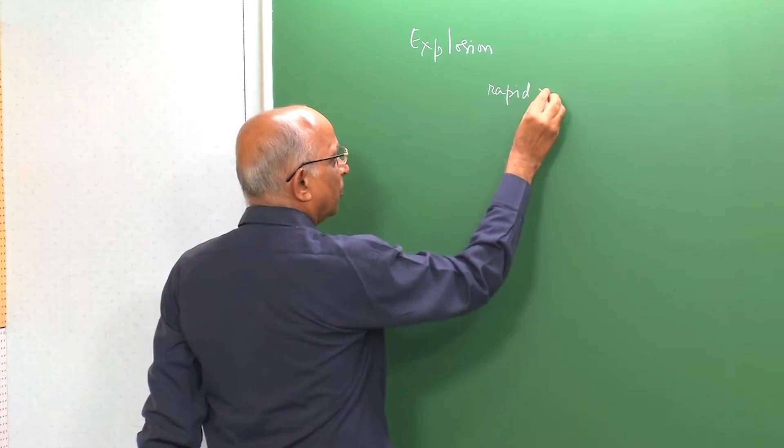Let us qualify it a little better. Suppose I have a region or a zone or a small volume in which some energy gets released. This energy release drives the blast wave which propagates out, and the energy release gets redistributed by the lead shock wave. When the lead shock wave is here, the energy gets redistributed in this zone, and so on. It is essentially the redistribution of energy which is impulsively deposited which leads to an explosion.

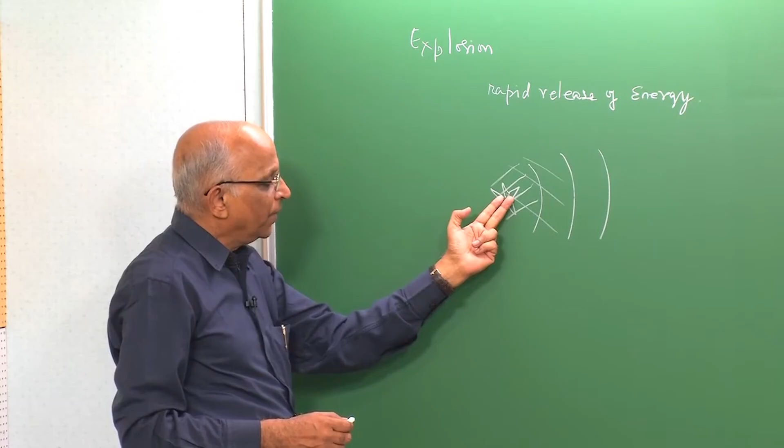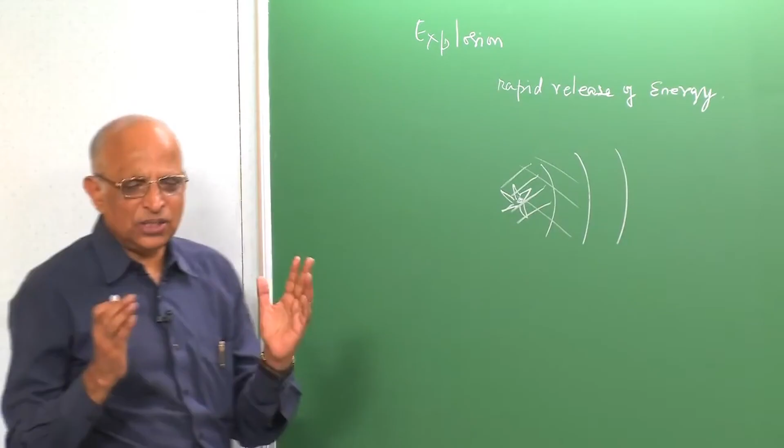When we talk about this redistribution of energy, it is the potential energy of the explosive which gets converted into kinetic energy and potential energy, but it is all contained within the lead blast wave. There is something important here, which we have been telling repeatedly: the material does not move, it is the energy which gets redistributed. This point must be kept in mind as we go along.

We also said there were two points. If this energy release gets into the thermal energy of the medium, it is unavailable energy, unavailable for driving the blast wave. Second, since the energy is redistributed, when the blast wave continually decays and reaches a faraway point, that is, when we are looking in the far field, the energy could get conserved. We will take a look at it in subsequent classes.

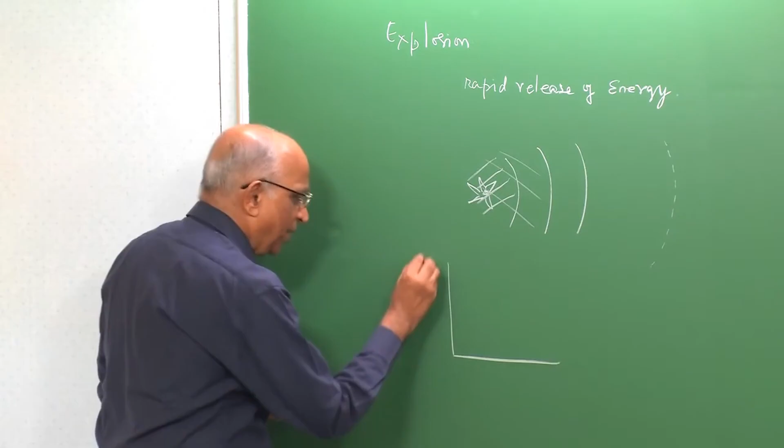This is the way we defined an explosion, and we found that the lead shock is continually decaying. On a streak diagram in which the y axis is t and the distance is x, or often defined as the radius rs from here, it decays out. Initially it travels a longer distance for a short time, then it becomes an acoustic wave in the far field.

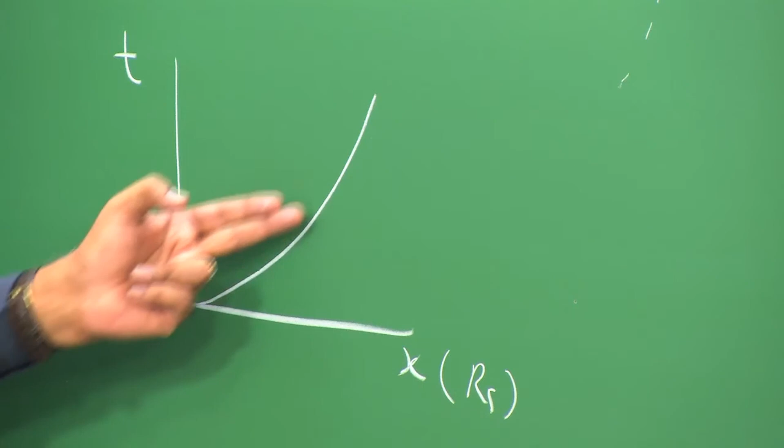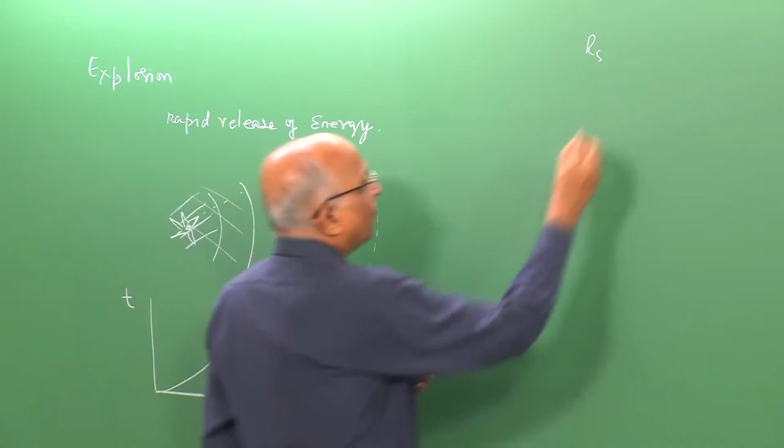It is continually decaying, the energy gets redistributed, it is a terrible transient, unsteady problem, and therefore difficult to solve. So we went through non-dimensional analysis, looked at the parameters, and got the dependence: the distance by which the lead shock travels at some time t after the impulsive release of energy can be written as Rs equals A t to the power 2 by 5.

The second point: the velocity with which the lead shock moves, drs by dt, which we denote Rs dot, can be written as a constant B times Rs to the power minus 3 by 2. We also found the rate at which the blast wave decays: denoting Rs double dot as d2Rs by dt squared, we have Rs double dot times Rs divided by Rs dot squared equal to minus 3 by 2.

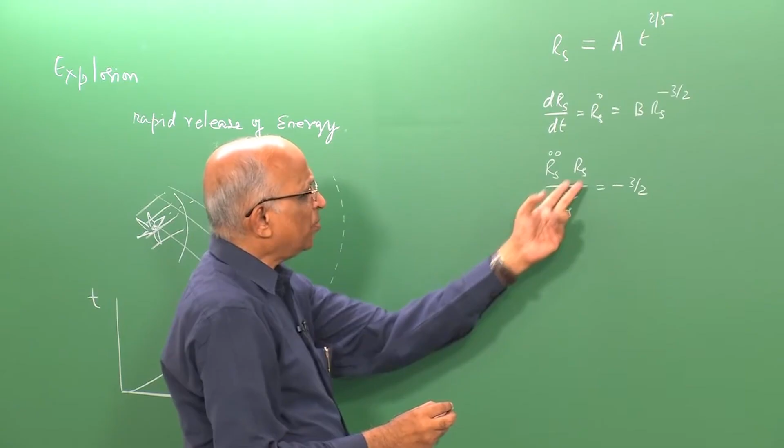In other words, since Rs is positive and Rs dot squared, being velocity squared, is also positive, it continually decays, and this is what we got from dimensionless analysis.

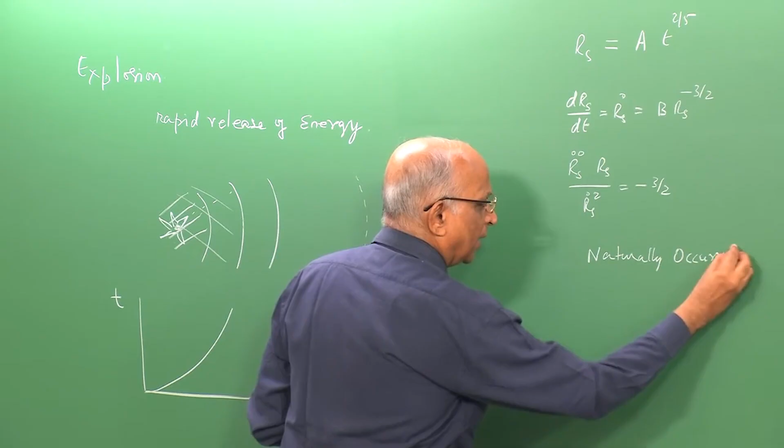Recall we said there are different types of explosions. We said explosions could occur in nature, which we called naturally occurring explosions. We also talked about accidental explosions, for example in the kitchen something leaks, gas leaks, and all of a sudden we have an accidental explosion.

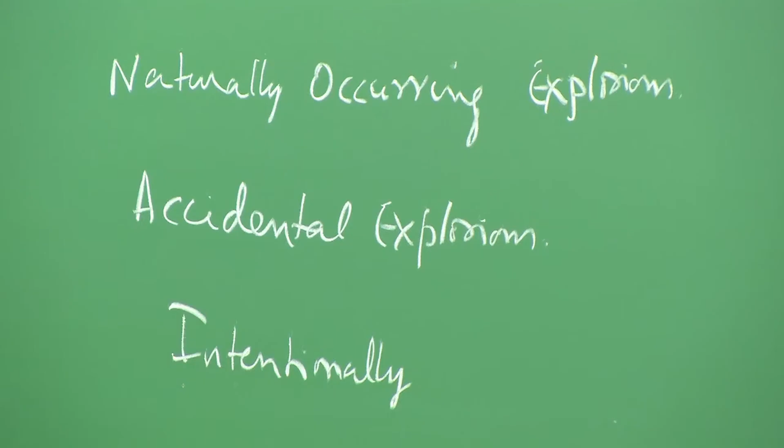We also talked about intentional explosions, maybe during warfare somebody drops a bomb at some place, or of late antisocial elements like terrorists who plant mines or explode bombs in crowded localities. We say these are intentionally created explosions, or intentional explosions.

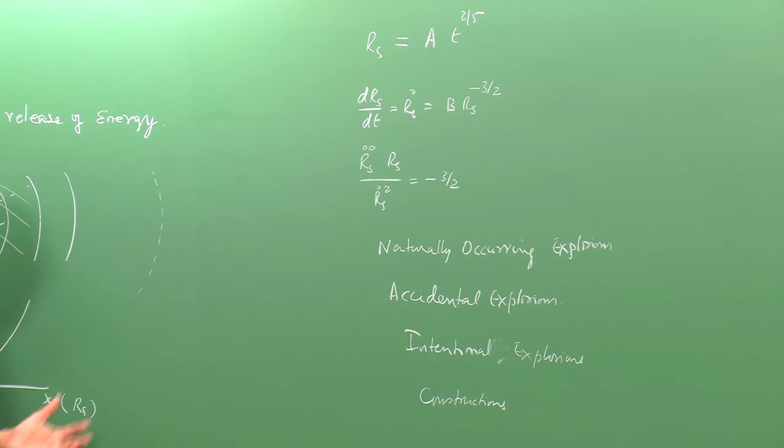We also noted that an explosion could be used for constructive purposes, like airbags, for surgery, or maybe for making canals and all that. Well, these were the different types of explosions we talked of.

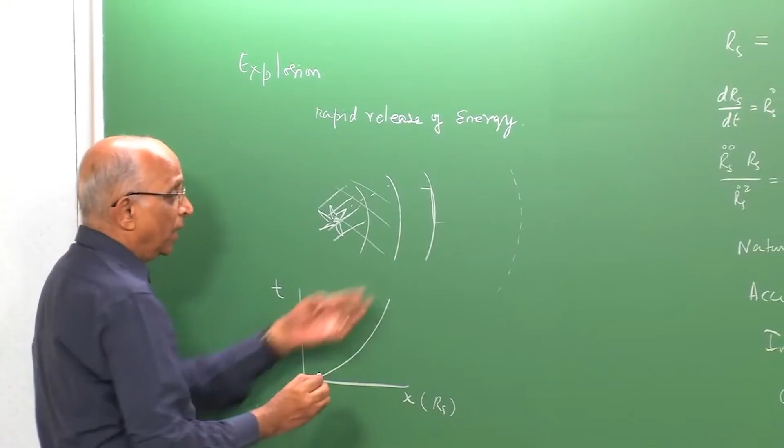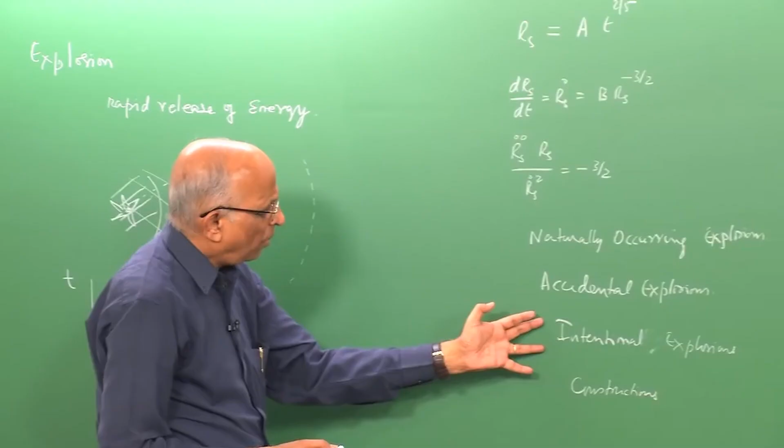Now in today's class, to relate to the theory we must develop, recall we just developed some value of the shock based on dimensional analysis without going into the detailed physics. But we also found that across the lead shock there is a spontaneous jump in pressure, from the ambient value to this new value, and behind it you have the momentum or impulse of gases. It's necessary for us to determine these quantities to find out the effect of the explosion on things around it. So if we go through some examples of different types of explosions, we will be better equipped to understand the theory.

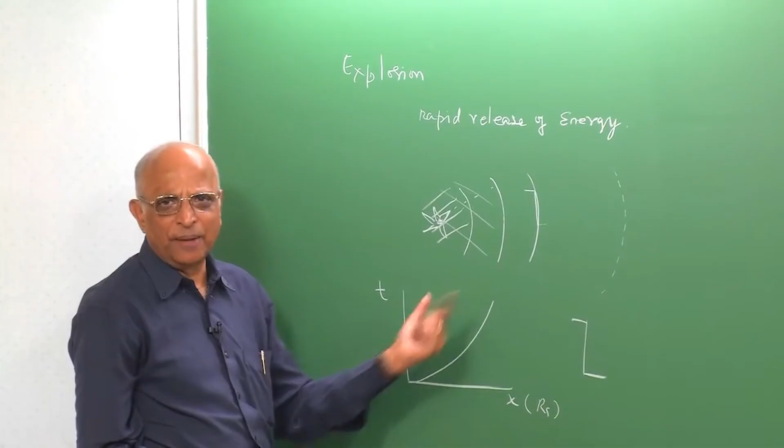Therefore, in today's class, we will take a look at different types of explosions and see how they behave, and based on that we will go back and revisit the blast wave generated from the energy source, and find out the parameters of a blast wave which could cause damage. Having said that, let me come to the first slide.

Let's go back and see what could happen. You have an arc discharge taking place, something like a line discharge, and therefore I will start creating something like a cylindrical wave which propagates out from here. This is Rs dot, that is the velocity with which it goes.

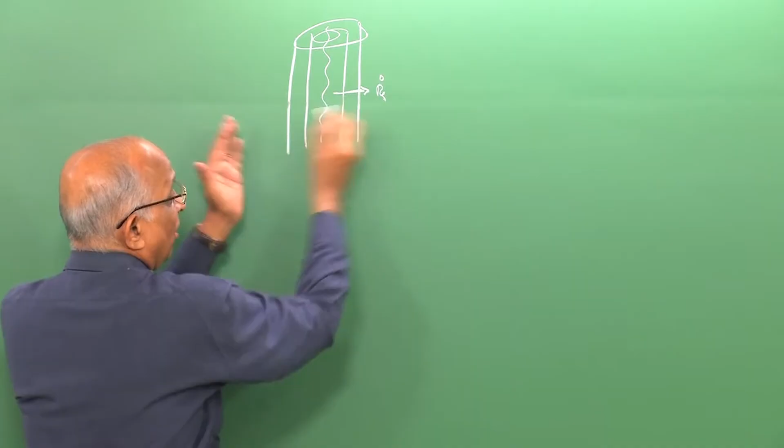In the near field, what is going to happen? I again plot t versus the distance, Rs, over here. Initially it starts at high velocity and decays out. In the limit, when the wave travels far away, I hear a rumble of thunder. If I am near to this, I hear an extremely loud bang, loud thunder, and far away I just hear the rumble of thunder.

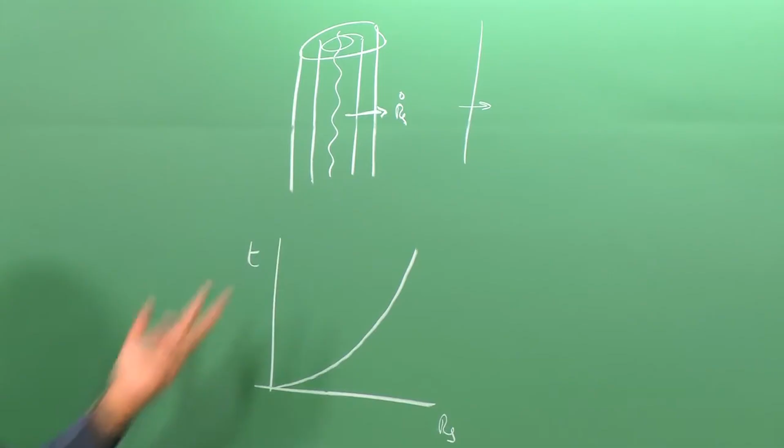We looked at this. Well, this is the first type of naturally occurring explosions. Lightnings are frequent; in some places they occur more often than not. Let us go to the next type.

The next is volcanic eruptions, and in this picture, again from National Geographic, I show a volcano spewing out fire as it were. I have a huge fire, and in this, hot gases are generated. The hot gases are sometimes charged, and therefore I could get an arc discharge, and something like a lightning, I could get a blast wave.

But very often what happens is, some of these volcanoes, when they erupt, there is also seismic activity, like tidal waves, or else the volcano is in the ocean. Very often during the volcanic eruption, seawater enters into the volcano, which is spewing out hot gases and hot, molten lava. When water enters and sees this huge hot mass of lava and hot gases, it spontaneously flashes into vapor, becomes superheated, and the energy is so high that it creates an explosion, something like a physical event wherein the phase of the water changes.

We had this very famous explosion at Krakatau, about 40 kilometers west of Java, which happened on August 26, 1883. Mind you, it is quite old, but this explosion is extremely famous. In fact, in this volcanic eruption, over a distance of about 4,500 kilometers away, the blast could be heard. Point two, over a distance of about 500 kilometers, the buildings got shattered. That is the power of this particular explosion—the blast wave generated created real havoc in this naturally occurring volcanic eruption.

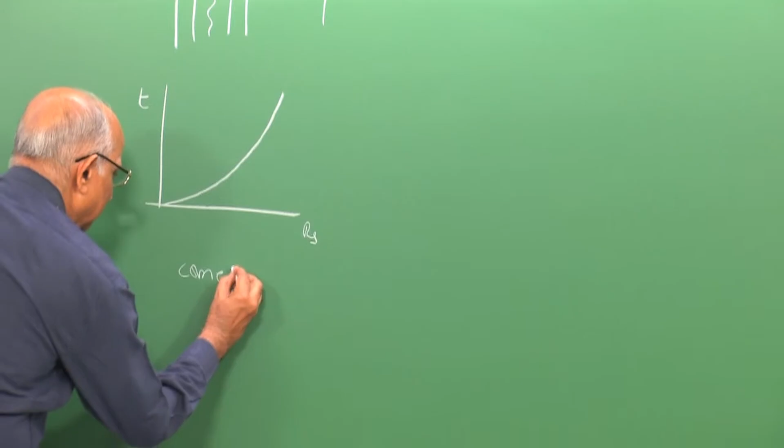We also talk in terms of asteroids in space. What is the difference between an asteroid and a comet? These are all loosely formed objects in space, not planets actually, and they do not have a particular type of trajectory. The asteroid consists of metal and rocky material, whereas a comet consists of ice, dust and also some rocky material. When the comet approaches the sun, the ice evaporates and a comet has a long tail, whereas an asteroid, having metal, is something which is more solid.

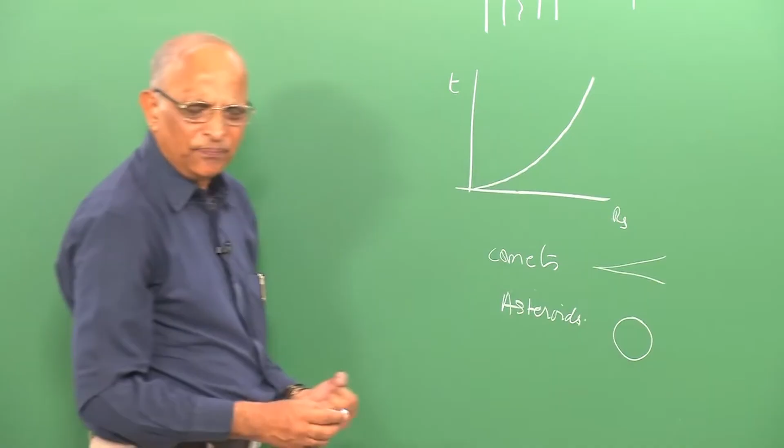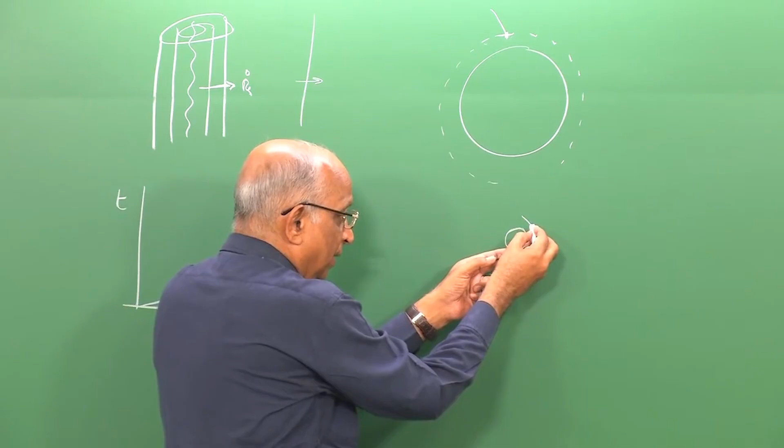Sometimes these comets and asteroids enter the earth. Above the earth we have atmosphere for something like 15 to 20 kilometers high, and when a comet or asteroid enters the atmosphere, it immediately creates kinetic energy and creates a blast wave to equalize the velocity. The energy release is so high that it creates a blast wave, and this blast wave can cause damage.

One such comet or perhaps asteroid, it is not very clear which, entered the atmosphere at a distance of around 8 to 10 kilometers over a place known as Tunguska in Siberia on June 30, 1908. The blast wave generated during this re-entry was so strong that over a distance of around 150 kilometers, the trees just got felled. Fortunately Siberia being a desert, there were not many buildings around, but buildings got demolished over a distance of something like 5 kilometers. That is the type of explosive energy release that takes place during the entry of an asteroid into the atmosphere.

It is not just one case of this. You will recall around a few months back, on 15th February 2013, over the Russian town of Ekaterinburg, we had a comet entering the atmosphere at a distance of around 5 to 7 kilometers above the surface of the earth. The blast wave it created was felt at a city known as Chelyabinsk, 200 kilometers away from where it really entered. Due to this blast wave, something like 200 to 300 buildings got broken, hospitals got damaged, and it was big news in all the newspapers saying meteor rattled Siberian city. Fortunately, nuclear and chemical facilities were safe, they were switched off for some time.

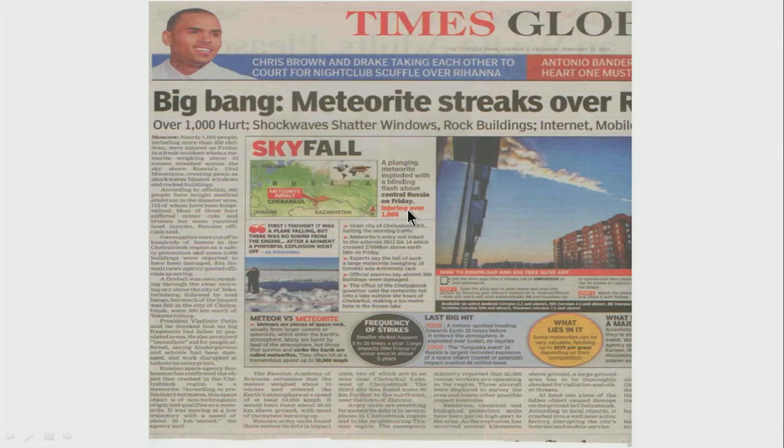Let us go ahead. The big bang from this comet was such that as it streaked over Russia, it caused shock waves, shattered windows, buildings got broken, and it led to services like internet and mobiles being affected. This is the type of power associated with a comet re-entering, and there is a lot of interest in comets and asteroids.

It was said to be about the largest size, and looking at the mean size of this particular comet, it's around 17 meters or so in diameter. It's a very small one compared to what was there over Tunguska, which was something like 30 meters diameter. Mind you, these are all small things which can really cause so much damage, and therefore there is quite a lot of interest in the blast waves generated when a meteor, a comet or an asteroid, enters the atmosphere.

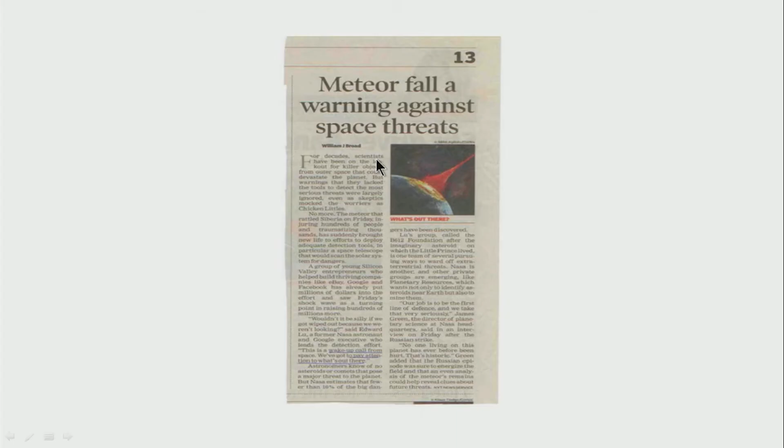We have this problem: when this asteroid re-entered, you find this brilliant flash due to energy release over this Russian town, and the blast wave creating the damage. Since some asteroid is supposed to re-enter the earth around, let us say 2036, there is some interest. I must also point out that one such huge asteroid is said to have re-entered the earth around 6 million years ago, and it is responsible for the extinction of life at that time, including the extinction of the dinosaurs.

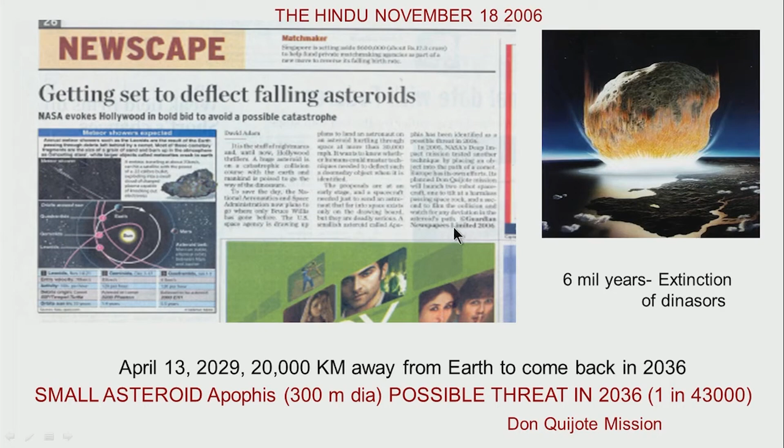This is the fourth type of naturally occurring explosions, and the last one, let us see what it is like. We talk in terms of stellar explosions, explosions in the star. You have a star whose life is going to get over, its fuel is consumed, therefore it has just neutrons in it.

Because of gravity, the neutrons shrink, it becomes very dense, and because of the density it explodes. High density, the neutron explodes, a lot of energy gets released, you have a brilliant flash, and I also show something like a supernova, that is a stellar explosion.

This is again taken from National Geographic, and what you find in these stellar explosions is the temperature reached during the explosion is so high that atoms combine to form heavy substances like gold, silver, maybe platinum, and the source of these materials on Earth is supposed to come from stellar explosions.

Well, these are the 4 types of naturally occurring explosions. Having seen these 4 types of explosions, let us quickly summarize. The naturally occurring explosions are...

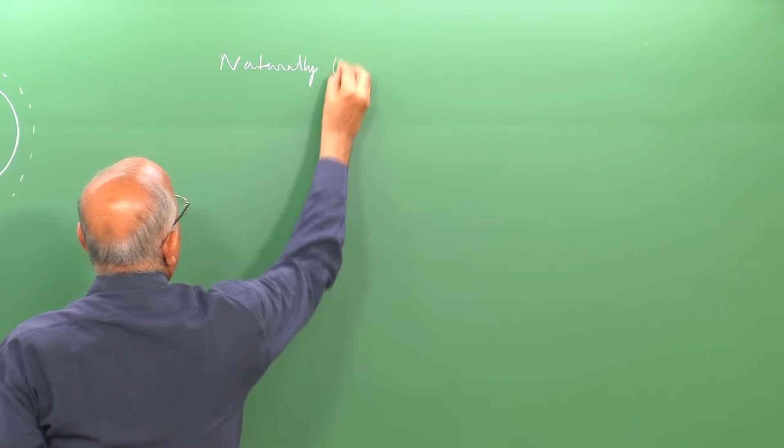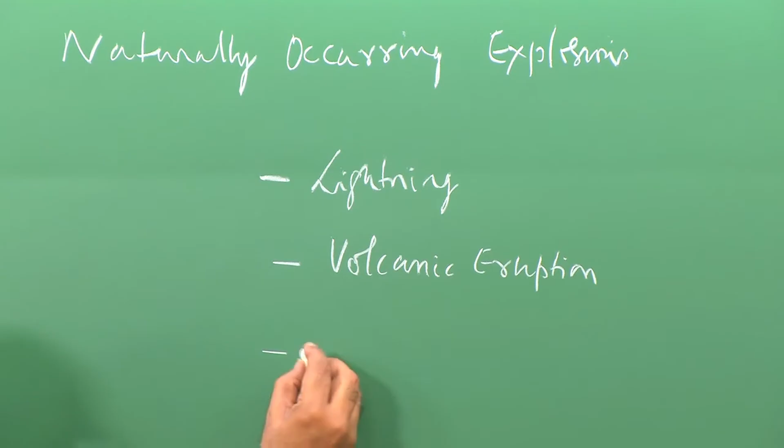Either, let us say, lightning. Second, we say volcanic eruptions, in which some physical explosion like seawater entering the volcano can release huge amounts of energy, like the one at Krakatoa. Maybe the third type, in which we have asteroids, comets entering the earth.

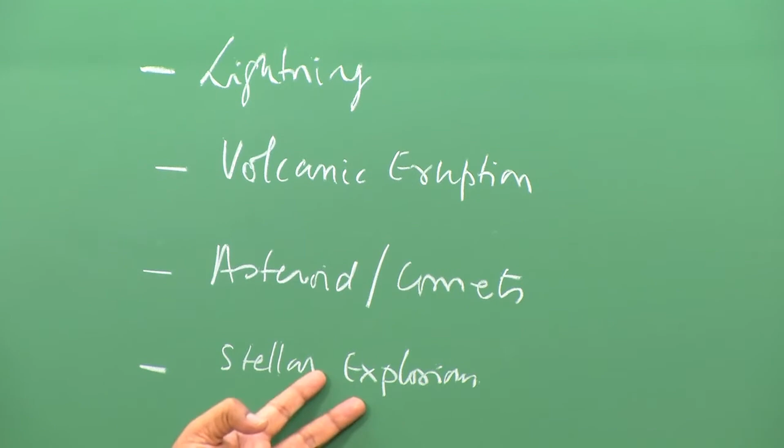And the last one, we said, could be stellar explosions. The stellar explosions cannot be heard for the simple reason that we have vacuum between the star and us, and therefore there is no question of sound reaching us, no question of a blast wave reaching us. But we must remember it is the light intensity which is seen, and also we have electromagnetic waves in the form of cosmic radiation which we perceive from stellar explosions.

Having said that, let us come to the next type of explosion, namely the accidental explosions. These accidental explosions occur quite frequently. Whatever precautions we take, somehow or the other an accident occurs.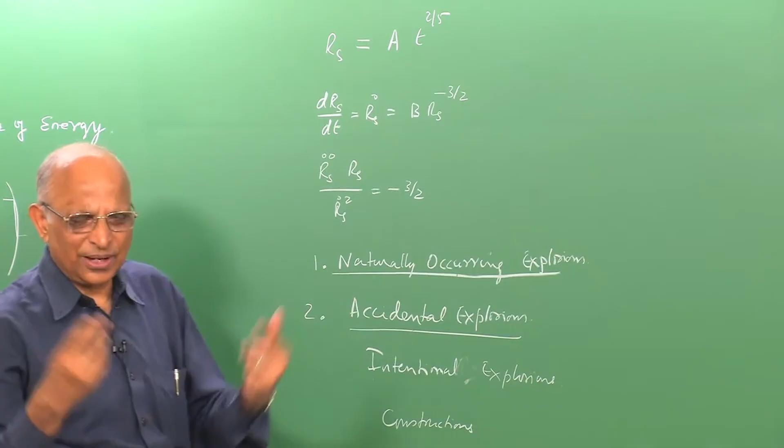How do we define an accident? Let us first be very clear what an accident means. When we say an accident, it means something like an unplanned event, right? Something which we have not planned, accident. And how do you say, well, anything, when I go across the road, something comes and hits me, say I meet with an accident.

Therefore, for unplanned activities, there is always a chance that an accident takes place, and the word chance in Arabic is given by the word Azhar. This is an Arabic word, and therefore, whenever we talk in terms of an accident likely, we associate the word hazard.

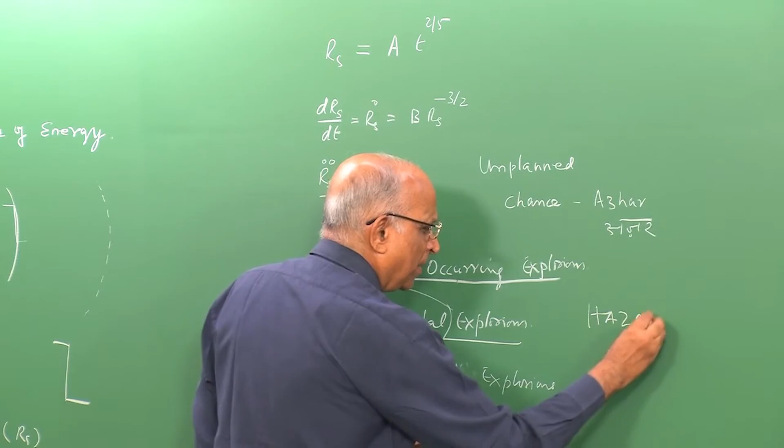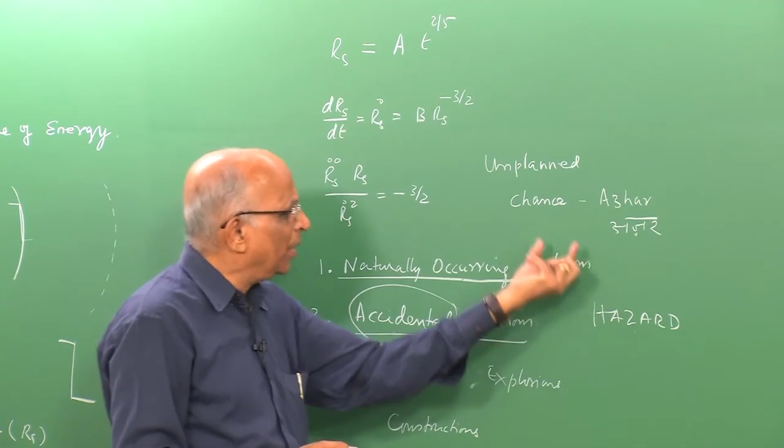Whenever we move substances which are somewhat likely to cause an accident, we say these are hazardous substances and we must be careful, and most of these substances are hazardous under some condition or the other. Therefore, let us take a look at some of the accidental explosions, and mind you, when we do risk analysis, we will address the hazardous nature of substances and see how to take precautions to avoid accidental explosions.

Therefore, I come back to the slide. I talk in terms of accidental explosions. Mind you, in the first talk I said about cooking gas exploding in the kitchen. Maybe there is a stove, maybe a cylinder, the gas leaks, mixes with air, somebody goes and puts on the switch or creates an electrical spark, and bang, the entire building is gone.

These accidents, even in a metro like Chennai, keep occurring, and there are something like 3 to 4 such accidents in a year, and you see the building getting demolished, the neighboring building getting demolished. We go to the next one. This also shows the same accident wherein the liquid petroleum gas stored in a cylinder gets exploded.

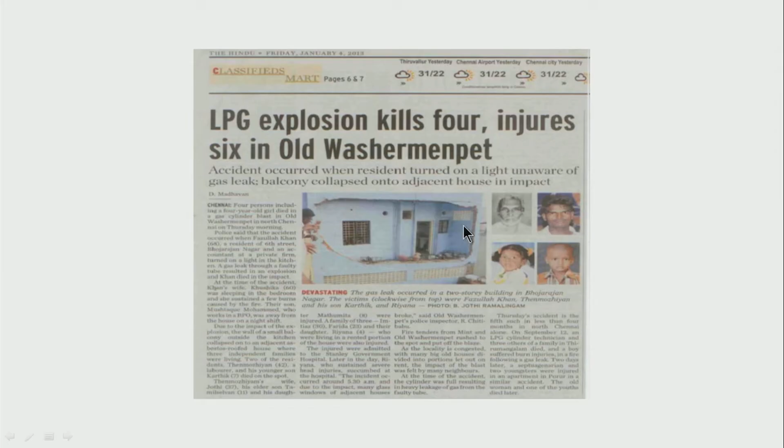Well, it is not only the gas from the cylinder which explodes. In the previous one, the gas leaked and created, within the confinement of the kitchen, a mixture which could explode. Well, when we transport maybe some substances which are reactive, in this particular case, this happened on something like...

24th March 2012, about a year and a half back. What happened is, this was a Korean ship which was carrying an explosive or reactive substance which was toluene, and this toluene is somewhat volatile. It formed a vapor and it exploded, and it resulted in the killing of a person.

Mind you, at that particular time there were not many people on the ship, but still it caused an explosion and created havoc. Therefore, whenever we transport energetic substances, we have to be careful lest an explosion or a blast wave is formed.

This is something which has been in the news for quite some time. On July 6, 2013, there was this huge number of oil cars or oil tankers being taken. There were something like 72 wagons being pulled by 5 locomotives in the township near Quebec in Canada.

And what happened was, maybe after parking these wagons safely, the brakes were put on according to the drivers, but somehow the brake got released and the wagons freely rolled.

And when the wagons freely rolled, they picked up some velocity and derailed, one wagon on top of the other, and during this process a leakage of oil took place. When the leakage occurred, it caught fire, and the heat from the fire increased the evaporation or pressure in the containment of the wagons, leading to a huge blast. The township near Quebec called Lac-Mégantic got totally devastated. Mind you, the death rate was not very high, but even then it was a major explosion.

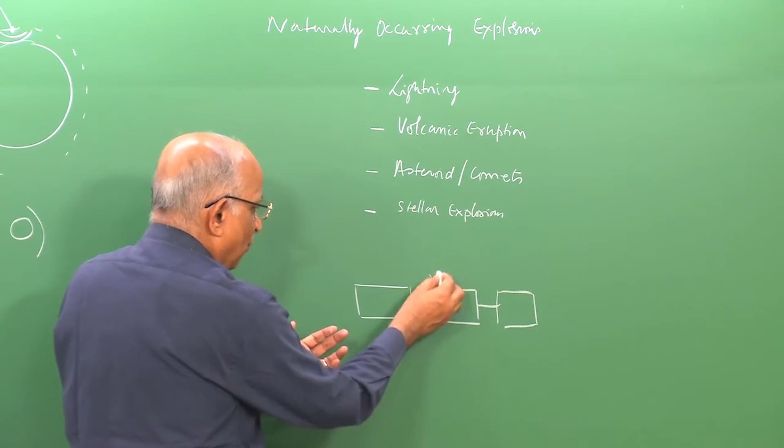Propane is essentially a liquid, and when it spills, it evaporates and forms a vapor of propane. When you have a spill taking place, you have a fire, and if this fire heats the wagon, the pressure inside it increases. You have hot propane here, and when the pressure increases such that the wagon bursts, you have a huge quantity of vapor generated. Not only does the wagon burst, but a huge quantity of vapor gets generated, leading to a huge ball of fire, and this creates a blast wave.

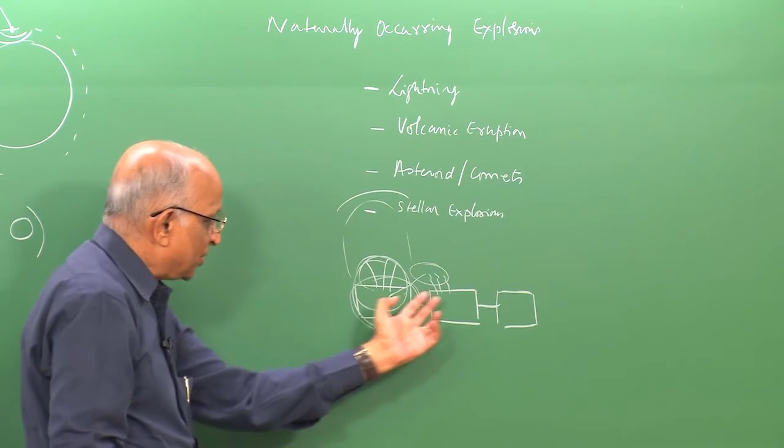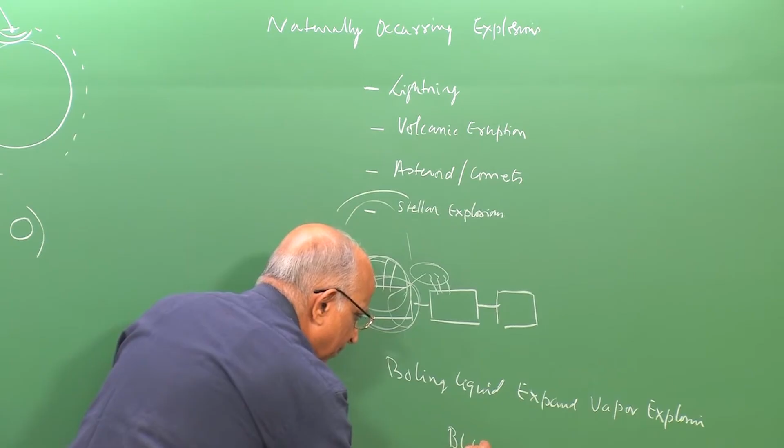This is known as a liquid getting heated from some other source - you have something like a boiling liquid expanding vapor explosion. It is known by the word BLEVE, boiling liquid expanding vapor explosion. This is what causes this explosion.

We have such explosions happening in our country at Jaipur, but it happens in the open atmosphere - it is an unconfined gaseous explosion, and these require some particular attention. We go to the next one.

In addition to a wagon exploding, when we have pipelines conveying liquid petroleum gas, liquid natural gas, liquid propane and all that, it is quite possible that sometimes leakage occurs in the pipeline. The vapor is released, or the liquid is released and vaporizes, catches fire, and creates an explosion. There are some typical explosions I would like to discuss. One happened at Port Hudson in Missouri. This picture I got from Professor Strehlow.

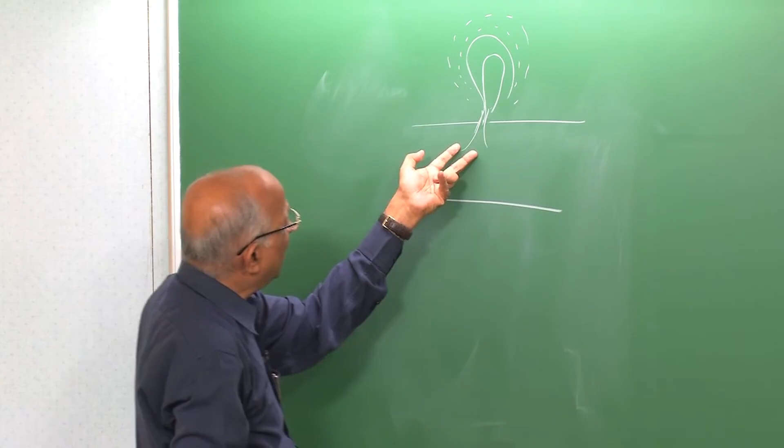At Port Hudson in Missouri, a pipeline carrying liquid propane - let us come back to this example. You have a pipeline, something like 0.2 meter diameter. The pressure was something like 50 bar or so at which it is communicated. There has been some rupture in the pipeline, and liquid propane is a liquid under atmospheric conditions at temperatures less than around minus 45 degrees centigrade. Therefore liquid propane escapes, forms a huge fountain of liquid, and then evaporates, creating a fog and smog of propane. This accident, as seen there, happens in the month of December when it is quite cold, and the surface wind at that condition was not very high.

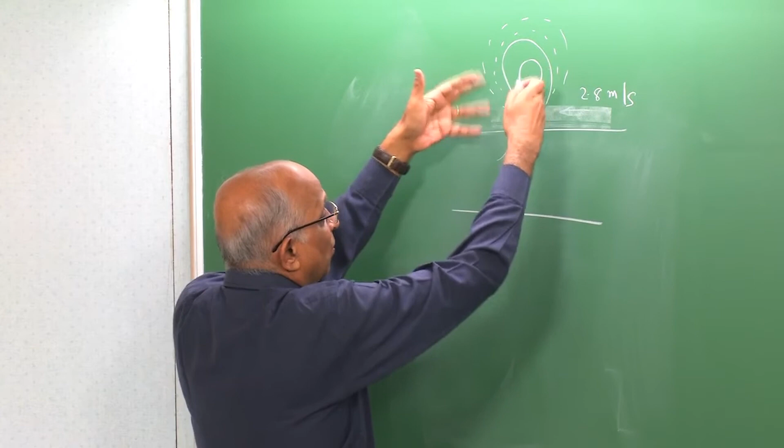It was around 2.8 meters per second, and therefore the cold propane just collected on the ground, as it were, over the ruptured pipeline, and it gradually moved. There is no ignition source at the point where the accident took place, so it just keeps mixing with air. Downstream, there was something like a valley.

There was a building over here, a concrete building, which housed refrigeration units so that foodstuff could be kept cool. The gas vapor moved here, through the crevices in the door and window, mixed well with air, and since there are motors in the refrigeration unit, it catches fire.

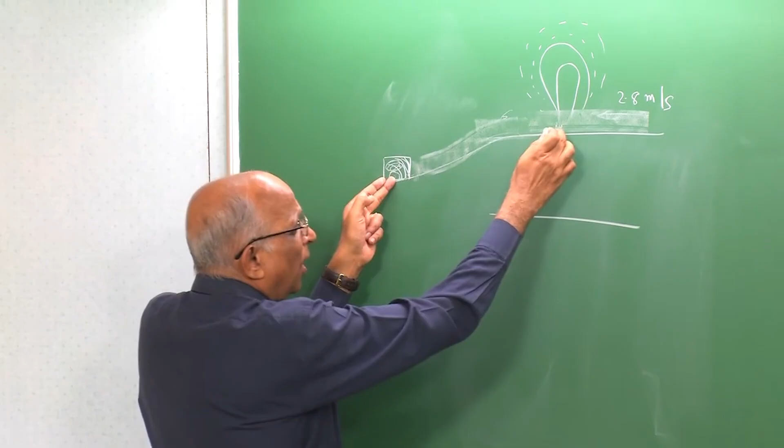It develops a blast, and with so many different units there, the flame becomes something like an explosion or detonation. It took around 13 minutes for the mixture to form and cause this blast, which then ignited the whole thing into a huge explosion. It could be heard something like 50 kilometers downstream, and it decimated the place.

This is the explosion involving liquid propane as it happened at Port Hudson. I come back to the slide again - Port Hudson, December 9, 1970.

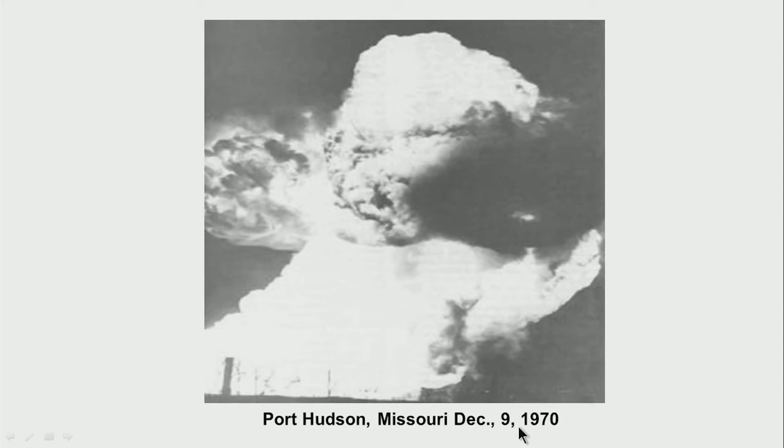We have a number of such explosions, and one is catalogued in literature as the largest man-made explosion ever. This happened in the Ural Mountains in Siberia. There was a pipeline around 0.7 meter diameter, conveying natural gas, essentially methane, designed for a pressure of something like 25 bar.

It was operated at 12.5 bar, but over a distance of almost 1 kilometer of pipeline, it ruptured downstream - something like 1500 meters downstream of the supply point. Nobody really noticed that gas was leaking. A huge quantity leaked, and mind you, this was June 4, 1989.

The spill accumulated on the ground and does not mix well with air. Let's go back and take a look at how this accident took place. The pipeline was conveying LNG, so over the ground you had low temperature methane accumulating, which does not mix so well with air.

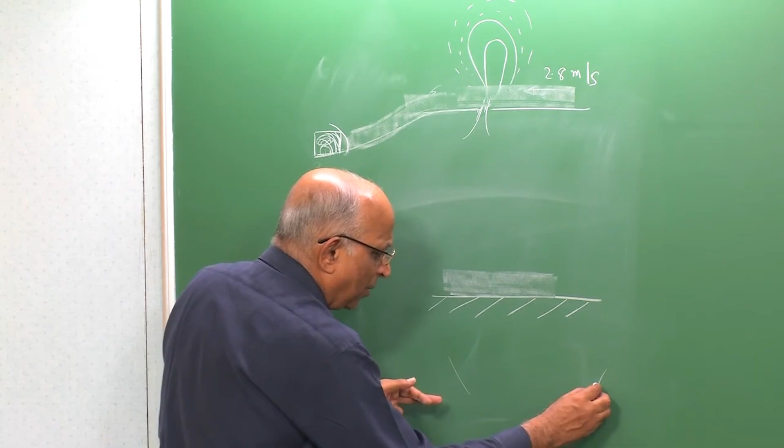There was no accidental ignition source - after all, it's a Siberian plain, not very well populated, with no houses or anything leading to spark sources. But if you look at the geography, on the east you have Vladivostok.

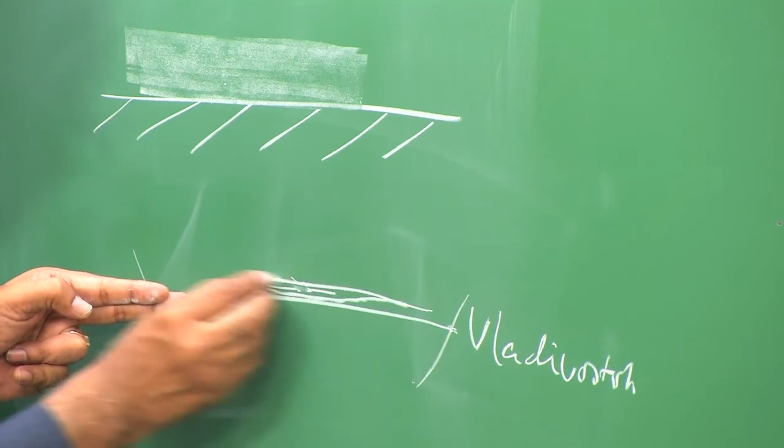There is a train that runs from Vladivostok to Moscow - the Trans-Siberian Railway - on a double railway line. As fate would have it, the spill took place over a long distance along both tracks, with a forward train going from Vladivostok to Moscow on one track.

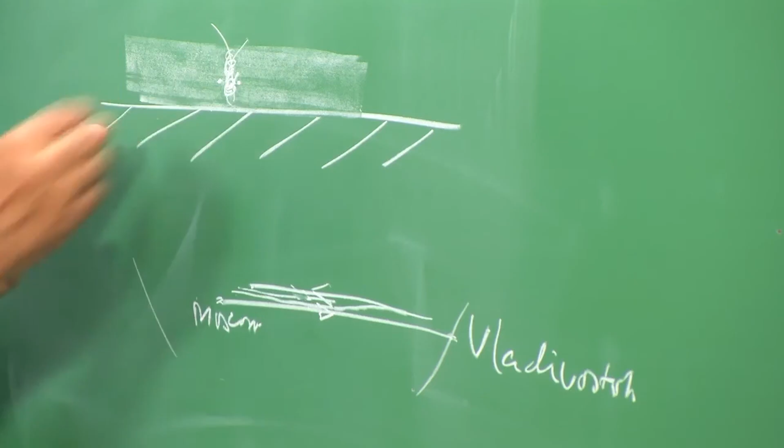On the other track, a train was going from Moscow to Vladivostok, and both were adjacent to each other. The turbulence generated when two trains pass each other mixed the gases well, and since these were electrical trains, the overhead electrical spark ignited it, causing a huge bang - the largest man-made explosion ever. It killed all inhabitants of both trains, something like 600 people got killed, and trees were decimated over a distance of 4 kilometers.

It is not only this pipeline - in many chemical industries, pipelines convey explosive substances from one container to another, and many such incidents occur in chemical plants. One typical example often quoted in literature is the accident at Flixborough in England on June 1, 1974, which created a ghost town in England that still continues to be a ghost town because of the damage it caused.

Let us go to the next example. So far, what have we looked at? We've examined explosions - accidental, occurring from gas in a confinement, and occurring from vapor in an unconfined geometry.

We looked at pipelines, we looked at wagon derailment, and now we come to something like solid substances. This accident took place on around April 17th this year, about 5 months back. This was a factory in the town of West in Texas, US, and they were storing ammonium nitrate. It is not very clear, the investigation is still ongoing, but let us take a look at it. We will be looking at some of the explosions involving such substances.

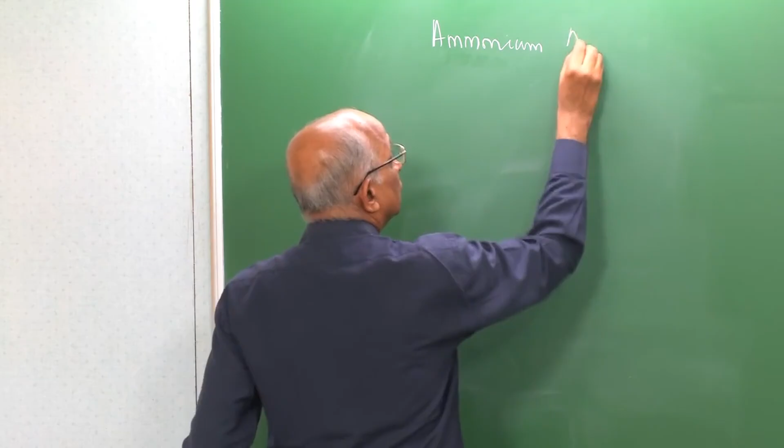Sorry, it is not ammonium perchlorate, it is ammonium nitrate, which is used as a fertilizer. This substance has both fuel and oxygen in it, and if it begins to catch fire, maybe it gets heated and the rate of release is high, and when a large quantity is involved, it goes into a chemical reaction which keeps feeding back heat to it, and you get such a powerful rate of energy release that a blast gets generated. This is what happened at the Texas factory in the town of West, and the entire town got decimated.

Well, in this case of a solid substance like ammonium nitrate, we say it is a condensed phase explosion. We take one or two more examples of this.

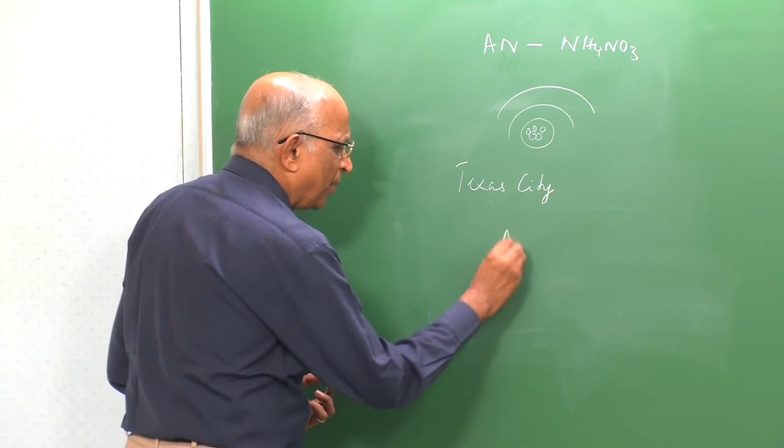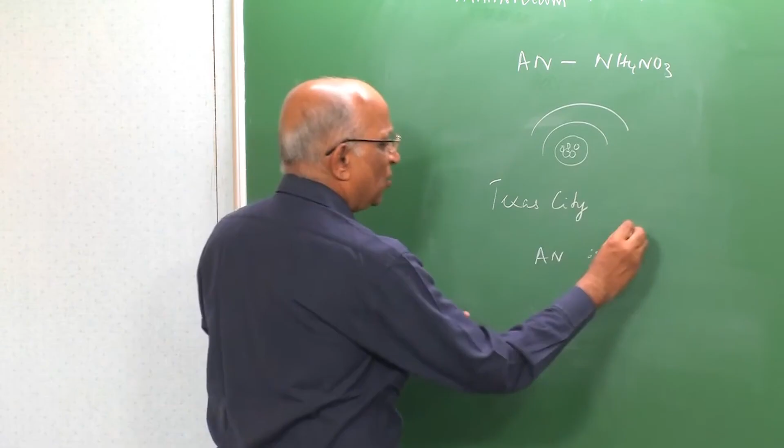Ammonium nitrate, NH4NO3, contains a lot of nitrogen. It is used as a fertilizer, and there is a lot of demand for fertilizer because you want to fix nitrogen in the soil. In this case, we do not want to use real ammonium nitrate directly, but we would like to make it more resistant to explosion, so wax is coated on the ammonium nitrate crystals such that its intensity of explosion or susceptibility to burning and explosion is reduced. So instead of AN, plain ammonium nitrate, you have what is called fertilizer grade ammonium nitrate, which is essentially coated ammonium nitrate, normally coated with wax.

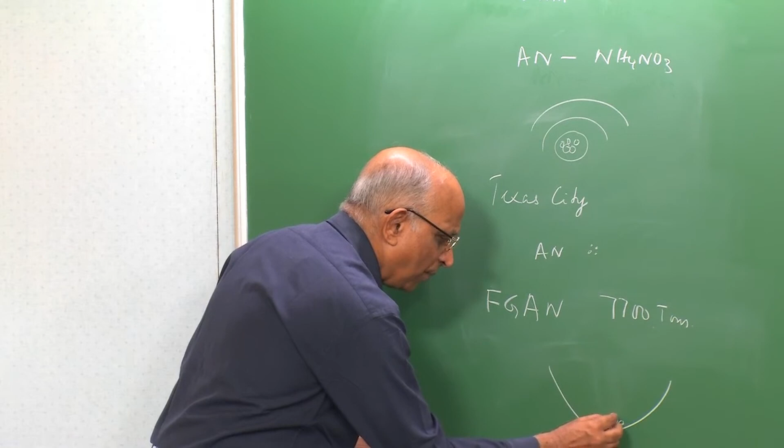In this particular case, you have something like 7,700 tons of ammonium nitrate, all in cartons or bags, stored in the hull of the ship. The hull of the ship is somewhat insulated, so heat cannot really escape from inside to outside or vice versa, and if the temperature increases, it keeps heating it up further. What was observed was that the temperature increased due to some chemical reactions taking place inside, there is always some element of reaction taking place, and when they found some smoke in the ship...

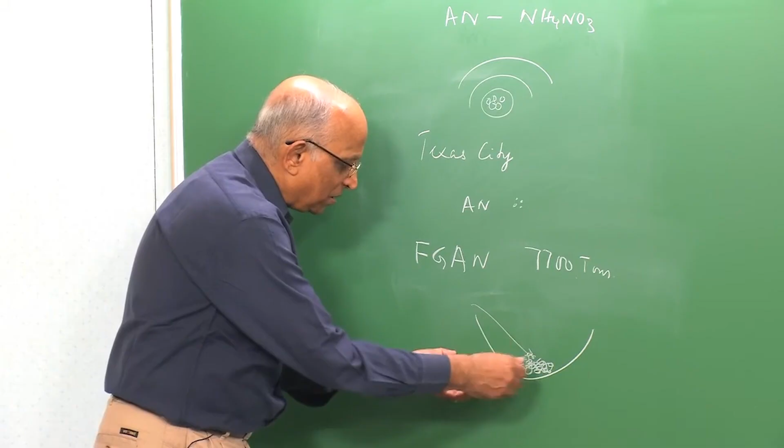People sprayed water and steam onto the smoke which was being created. Now the temperature kept going up, and the steam further contributed to the reaction, so the chemical reaction got terribly increased because of this. There is a spiraling of the rate of chemical reaction as time progresses, it builds up, and the rate becomes so much that high intensity energy is released spontaneously, and you have a huge blast wave which gets generated. The blast wave in this case was so strong that the entire hull of the ship got blown off, and it was carried over a distance of a few kilometers.

Almost 600 people died. Over a distance of 16 kilometers from the site of the explosion, well, nothing remained. People got knocked down, buildings got destroyed. Over a distance of 60 kilometers, trees were uprooted, and this explosion from Texas City could be heard at a town 400 kilometers away, and that is the intensity of this explosion.

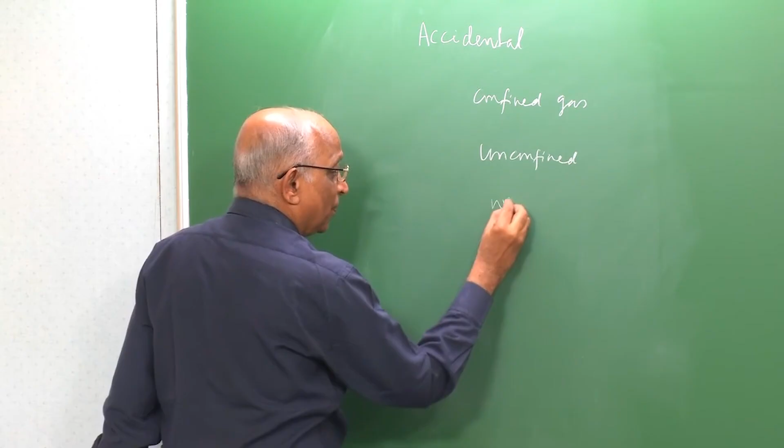What have we considered so far? Let's quickly review ourselves such that we can look at some other explosions and draw some examples. We tell ourselves, well, accidental explosions - an accident is an unplanned event. It could be something like a confined one using gases, it could be unconfined, it could be something like wagons derailing, and we have boiling liquid expanding vapor explosions. We could also have solid substances like condensed explosions, in which maybe some chemical reactions occur, like in Texas, maybe at Sivakasi, we have all these condensed explosions.

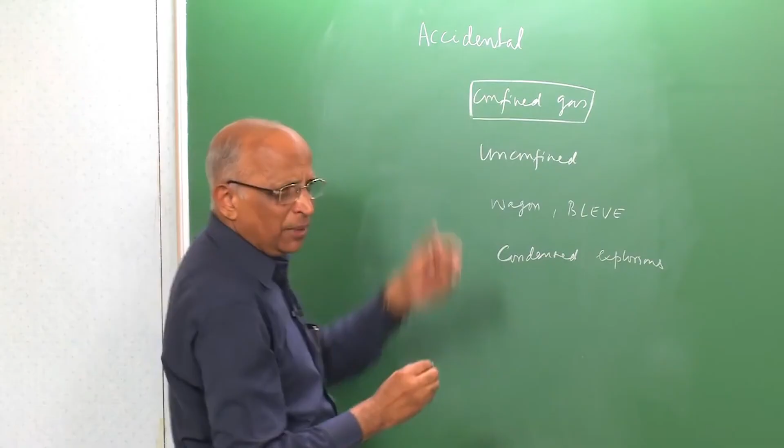There was this particular aircraft which took off from New York on July 17, 1996. It was the TWA 800 flight, and since it was supposed to go over a short distance, not all the fuel tanks in the aircraft were fully filled with kerosene, or what we call jet fuel, in New York. It was the summer month, mind you, it happened on July 17th, and therefore one central fuel tank was near empty, because that much fuel was not required for the flight from New York. I think it was going to Europe, and therefore the quantity of fuel which was loaded was not in all the tanks. 11 minutes after takeoff, the aircraft just exploded, and it was a huge fireball.

Analysis showed that since the central fuel tank was near empty, there was a small amount of kerosene - aviation kerosene - in it, and on the ground, wherein you have a lot of air available, an explosive mixture could not be generated. But the moment it goes to higher altitude, wherein the air is less, a combustible mixture with air got generated, and at that point some electrostatic spark could have resulted in this particular explosion. It is again a confined fuel-air explosion, in which you had a huge fireball; all the passengers and crew of this flight were killed in this particular explosion.

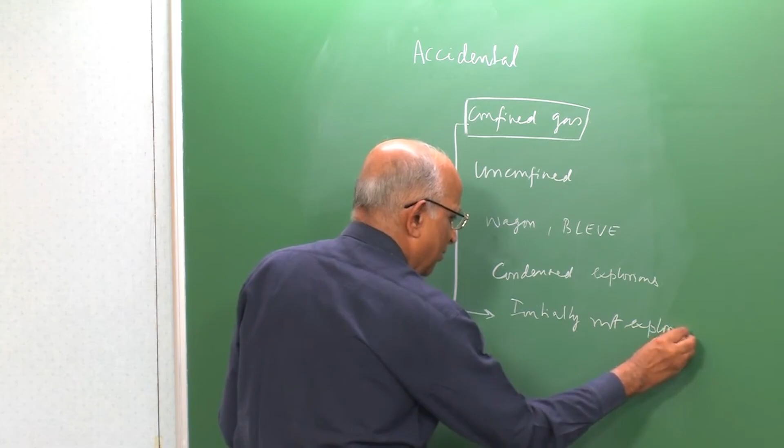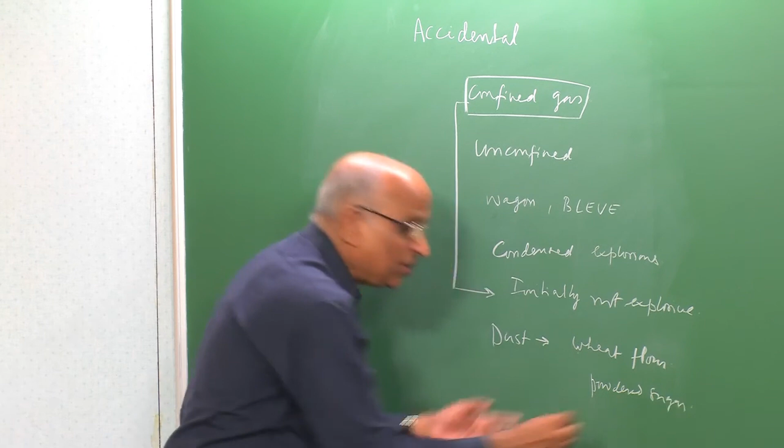It is not only gas, liquid, and solids - energetic solids - but dust can explode. I would like to qualify this further. What did we just say? Well, I could have confined explosions because of maybe some tankage, maybe a gas mixture which is formed, which is initially not flammable or not explosive, but which becomes explosive under certain conditions. We tell ourselves not only solids, liquids, and gases are explosive - dust, like for instance the wheat flour we consume to make bread, or sugar, or fine powdered sugar used for icing - all these are explosive substances. If mixed with air in sufficient quantities, it could explode.

One such instance, the first recorded dust explosion, was in Turin, Italy, on December 14, 1785, wherein a particular baker sends a boy to the godown to collect some flour - I think it was wheat flour or maize flour, I'm not very sure. This boy, in the evening, which was quite dark, takes a candle in one hand and picks up the flour in the other. Being a boy, he is playful, he tosses the flour, and this flour, when it mixed with air, exploded - and this was the first recorded dust explosion.

We have such explosions involving dust in large numbers in the US, wherein they handle food crops in confinement. We had this in Wichita, US, wherein 7 people were killed in a dust explosion involving, I think, wheat dust. We also had an entire port terminal destroyed in Brazil in November 2001, which was conveying grain being unloaded at the particular port. Therefore, dust explosion is also a type of explosion which could occur.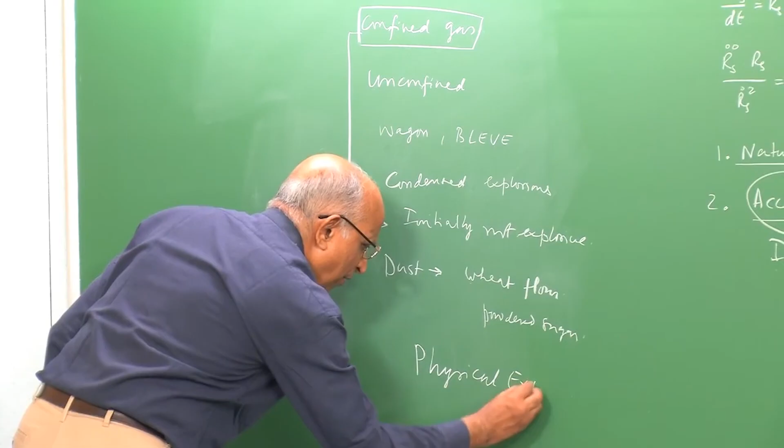We already talked in terms of physical explosions when we discussed the volcano, in which water got into the volcano, got terribly heated up, and superheated vapor formed an explosion. In physical explosions, it is essentially a substance which is not a combustible or high energy substance, like water, which can create an explosion.

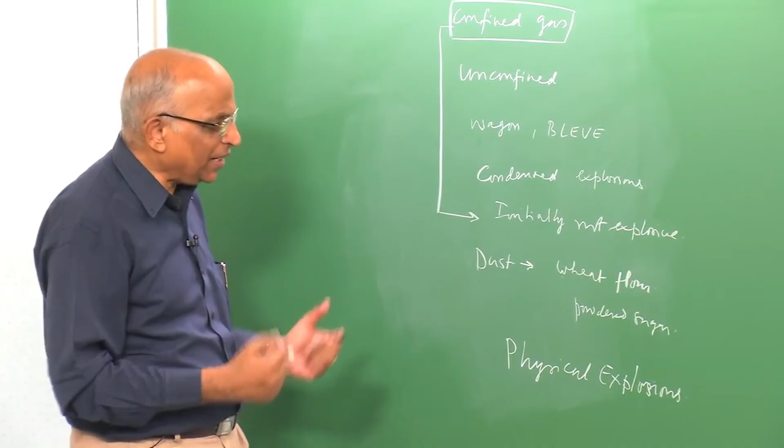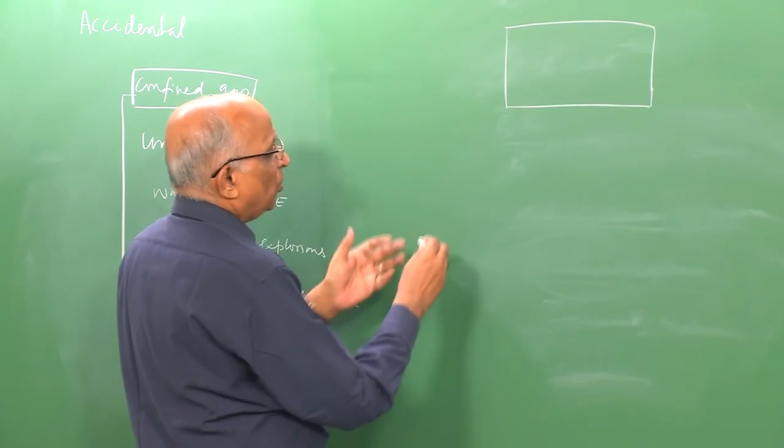Let us take an example. In a particular place in Canada near Ottawa, at a place known as Flin Flon, there was a copper smelter. Towards the evening on a weekend day, people wanted to go home early. The smelter had a reverberatory furnace or crucible furnace which was hot, but they had to cool it down before leaving. So the operator took water in a pail and pushed it into the furnace, which was quite hot at that point. All of a sudden, because of the thermal inertia of the furnace, the water just flashed into vapor and created a blast wave, injuring people.

This is the type of explosion that happened on August 8, 2000 at Flin Flon, a town near Ottawa in Canada, wherein in a copper smelter we had flash vaporization driving blast waves and an explosion. Such type of explosion was also seen in the case of the natural explosion at Krakatoa, where you had a huge explosion. These are the types of examples I collected under accidental explosion.

Now let us spend a minute or two on intentional explosions. Let us come back to this.

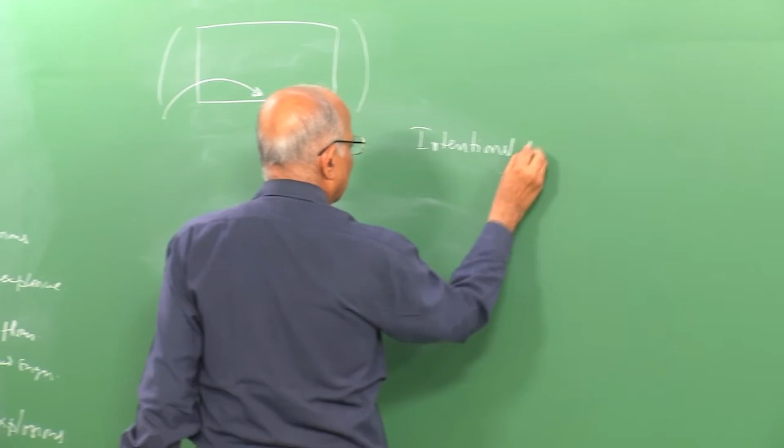Unfortunately, of late we find terrorists and anti-social elements engaging in this type of affair. One such example is what happened at Oklahoma City on April 19, 1995, wherein a nice posh building, which housed a nursery with children, was brutally damaged by a blast. A truck carrying solid explosives was parked nearby. It was ammonium nitrate, which was a little more energetic. We will get into the details when we study condensed phase explosions. The blast wave just ripped off this building.

This is not the only type, it keeps happening all over the world of late, in Afghanistan, in Iraq, and in India we have these improvised explosive devices, and mines being planted. Nowadays we talk of these explosions as low intensity conflicts, and we have to design the system such that the buildings or the type of the blast wave could be controlled, or the structure should be so strong that it does not really get affected by this.

Well, these are the intentional explosions. You will also remember at the Boston Marathon a few months back, terrorists put an explosive or energetic substance in a pressure cooker and killed people.

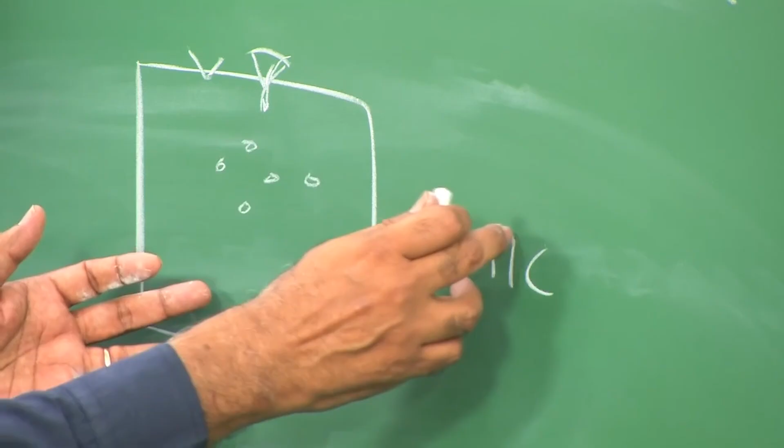In this particular plant, which was a carbide plant, methyl isocyanate was stored in tankages with valves. Somehow a hood-like device which would prevent water from ingressing into the tank was missing. When it was being cleaned, some water got into the tank, and the tank was also a little dirty. There was something like chloroform and some iron inside the tank, and when water came in contact with methyl isocyanate, it began to react, carbon dioxide got generated, and these impurities further fueled the reaction.

As a result, pressure in the tank increased. Normally in these plants you have refrigeration coils which control the temperature of the system, but it was December, it was cold, and these were not operational at that point. Gas got generated, the pressure went up through the vent valve, and a mixture of MIC and MIC gas got released. The scrubber was unable to control the mass flow rate of it.

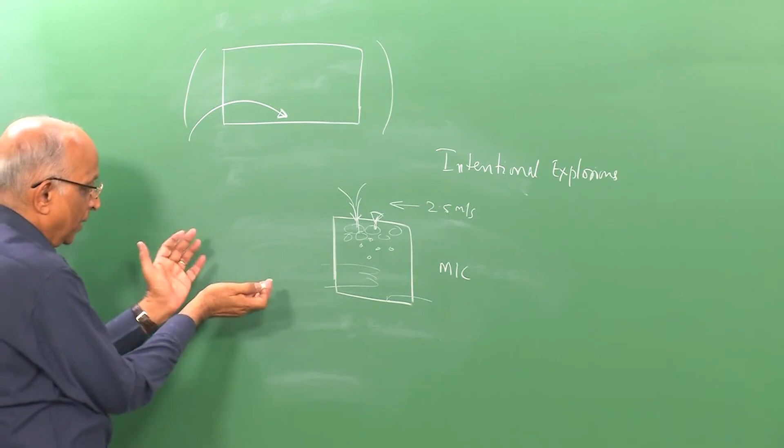The wind velocity was low at around 2.5 meters per second, and being winter time, the temperature on the ground was lower than above. With the result, we say atmospheric inversion. The gas was not able to diffuse out vertically, preventing the methyl isocyanate from dispersing away from the people downstream.

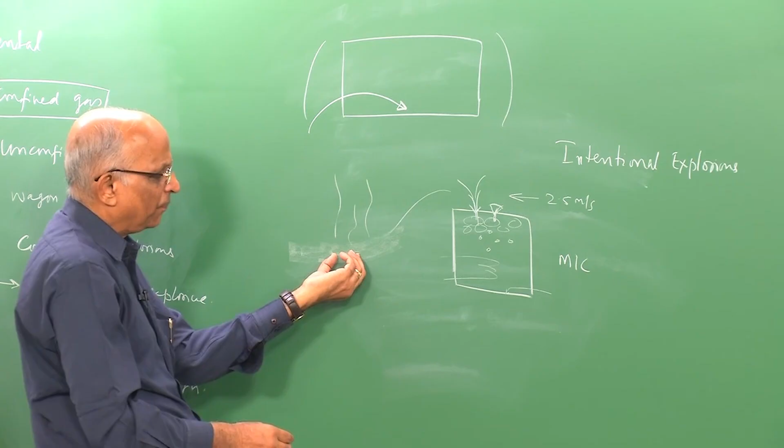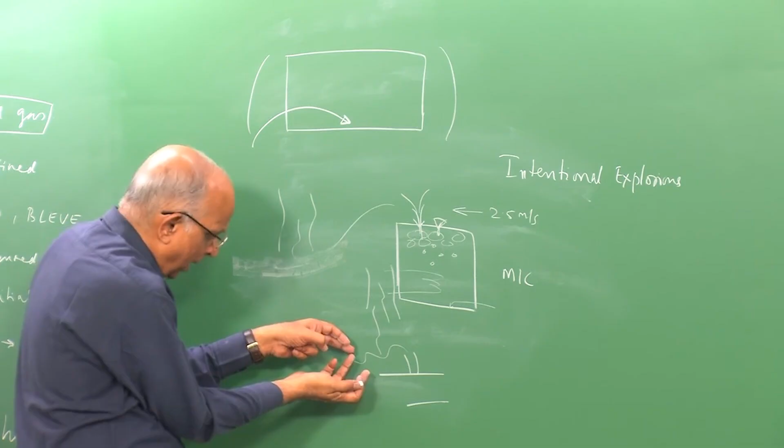With the result, it drifted, and whenever it came in contact with people, either they got blinded or when the dosage went up, they just died. That means we are talking of atmospheric effects. Even when we talk of gas leaking from a pipeline, the ability for the gas to disperse into the atmosphere depends on stability conditions. An unstable atmosphere allows the gas to get lost, but this does not happen under certain conditions. Therefore, atmospheric dispersion is an integral and important part of explosion physics, and we could have accidents due to atmospheric dispersion. The world's worst case was the Bhopal gas tragedy, in which some 20,000 people were killed.

We also had the Great Smog of London. This happened on December 5, 1952, again in winter time. During winter, people burnt more fuel to stay warm, and in those days the coal was also not of good quality. It created sulfur fumes which got trapped over the surface of the earth. This permeated into buildings, and something like 12,000 people got killed. In addition to pollutants and dispersion, we recognize that combustible gases could also move and mix with air, making atmospheric dispersion important.

The last category is nuclear power plants. You have loss-of-coolant type accidents, in which hot metal comes in contact with water, generating hydrogen, and this hydrogen exploding. We had this in Fukushima in March 2011, about two years back. We had this almost imminent in Three Mile Island on March 28, 1979, but it did not explode. We had this happening in Chernobyl, and the only thing done was the whole thing was encased with concrete and steel, so nothing more was allowed to happen.

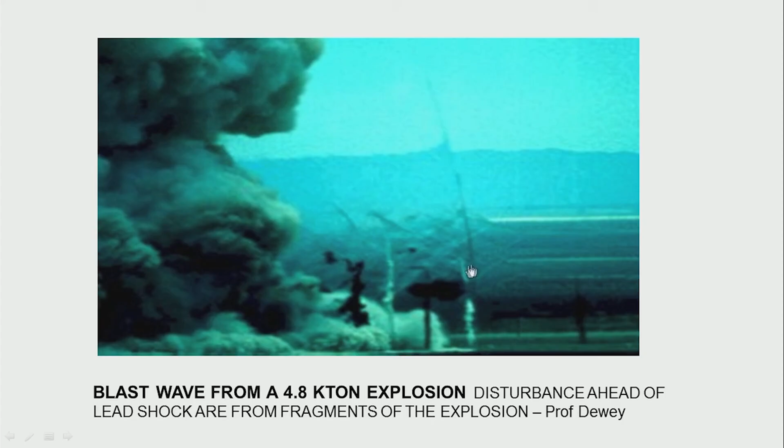To sum up, we talked of different types of explosions: the largest man-made explosion, and nuclear explosions. We did not get into Hiroshima and Nagasaki, which I talked of yesterday, but you could also have fission and fusion generating explosions. We will not deal with fission-fusion, but we will look at loss-of-coolant type accidents. We talked of the explosion in a fuel tank in TWA 800, and of dust being explosive, where even fine powder of eatable things becomes explosive. In our own country, we have propellants exploding at one of the assembly points in the Indian space program.

We also had the BLEVE-type explosion at Jaipur in an oil refinery on 29 October 2009. We had several such BLEVE explosions at Visakhapatnam, and also the BLEVE explosion at Crescent City in Illinois. These are the different types of explosions, and to sum up the different categories, I will put it in a slightly different form.

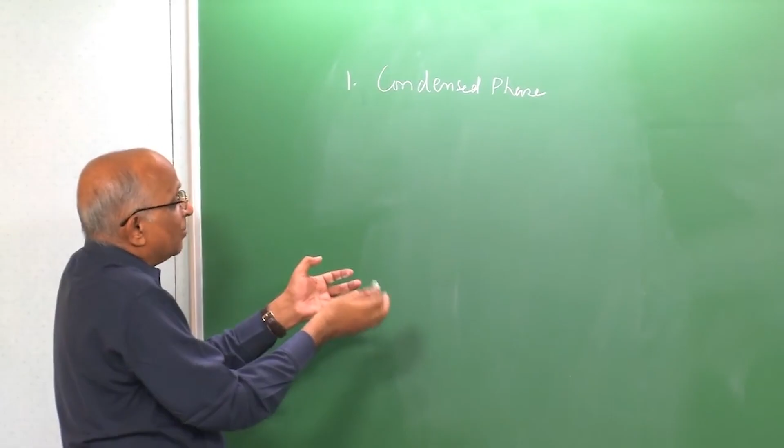We looked at different types of explosions and found they cause a lot of damage to life and property. The first type is a condensed phase explosion, in which solid substances are associated. It creates more and more heat, like a feedback loop, and the rate of reaction goes up. This is a thermal type of explosion.

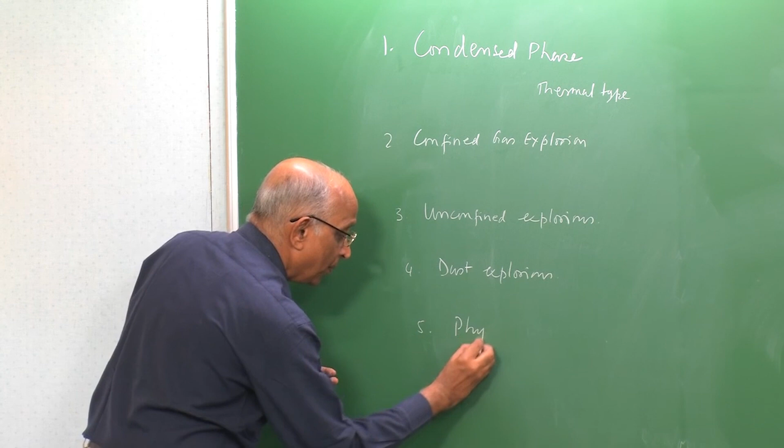We talked of confined gas explosion in a room, in a confinement, and also of unconfined, vapor-cloud type explosions. The fourth one: even dust could explode, dust explosions. We talked of physical explosions, meaning vaporization of substances taking place. We covered confined, unconfined, and solid substance explosions, as well as atmospheric dispersion.

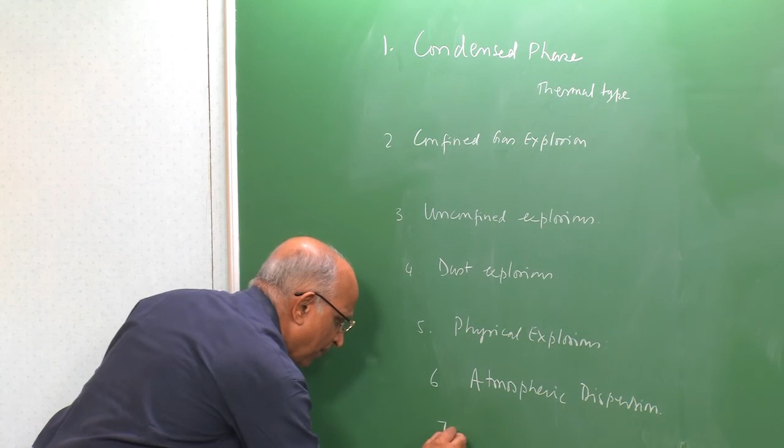We talked of loss-of-coolant analysis, the nuclear explosions. These are the different categories of explosion, and having understood them, our next step is to go back and look at how the release of energy from an explosion drives a blast wave. We will try to model the blast wave and find out how.